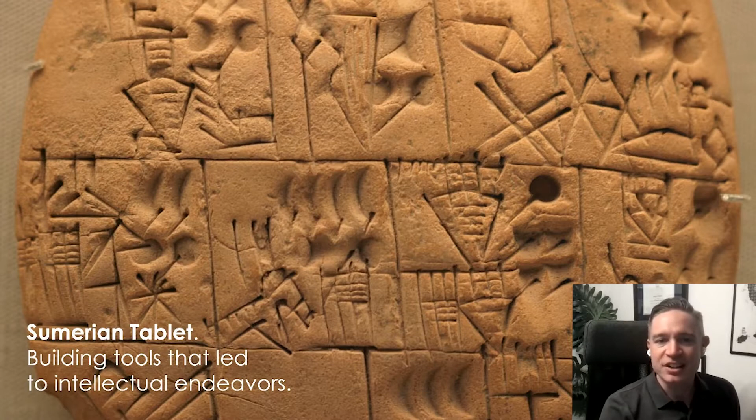The idea of writing and the idea of capturing language and communication took several iterations. The Sumerian tablet is likely the earliest, but interestingly, this as a technology allowed concepts and ideas to go from person to person, transcend generations. So now knowledge could be built over time and through many generations of people. Shortly thereafter, math was also a concept that started to come into existence, and one of our most important endeavors as we continue to push forward with technology.

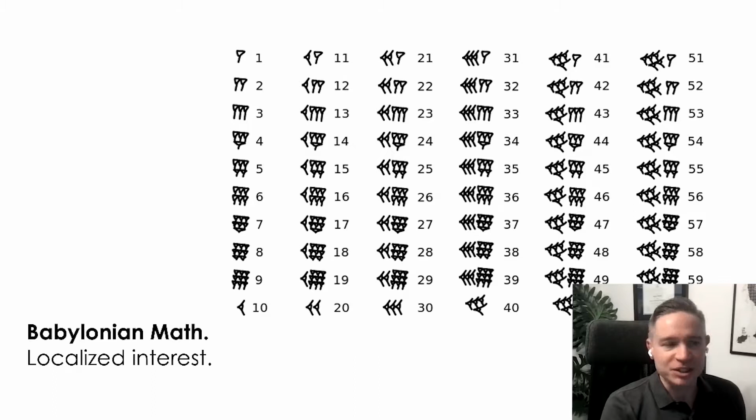But math was critical to being able to understand structural integrity. And with that, having an easier way to distribute information and distribute the learning of concepts like math required another invention, and that was something easier to capture ideas down on. So that was paper. So math, paper, and regional resources were what led to vernacular architecture.

And that was the study of certain materials and the way objects came together that performed well in our particular locale. And so now the advantage is that the locale had time with a particular type of materials where aesthetics started to be born, and the recognizable form is what we see as vernacular architecture. The abacus was our first calculator. Calculators are an incredibly important tool to visually understand mathematics, going beyond arithmetic and into even more complex concepts like algebra. Looking at anything with actual calculation required a tool to be able to do that.

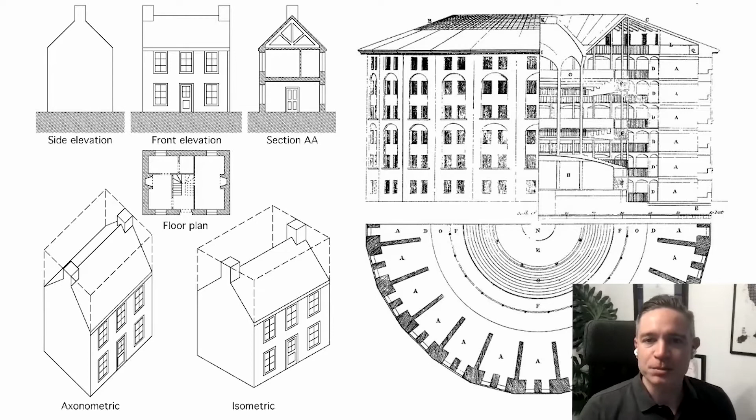Simple calculators and the written language led to engineered drawings. And so drawings is a very critical component of understanding the ideas and components of architecture and engineering and distributing them among many people. It allows us to simulate a construction before attempting it, and so saving all of that time, trial and error, to learn how we can build better performing structures. And the pursuit of building architecture or engineering, having drawings and simple calculation being served by simple tools, pencils, pens, straight edges, and paper was enough for hundreds of years.

And only one other invention is worth note here, and it's the Dewey Decimal System. And this idea of indexing is an incredible intellectual endeavor that led to many big ideas, as we'll get into in this conversation. The mechanical calculator is an adaptation on the abacus, and it was the first time really large numbers started to be conceptualized and put onto paper. And with this idea, mechanical calculator and paper, that was enough to build the modern world as we recognize it today. In the 50s, there were no computers, but there were large structures, simulated designs, and advanced engineering concepts at play.

Shortly thereafter, the computer began to form. And it is a series of calculators and transmissions of electric signals that can yield even more complex ideas and transcend even more generations with the way information can be learned, can be leveraged, and can be applied. Because of this, the technology itself started to get smaller, actually. And so digital calculators were able to now be a much smaller form of tool and much easier distributed among many people.

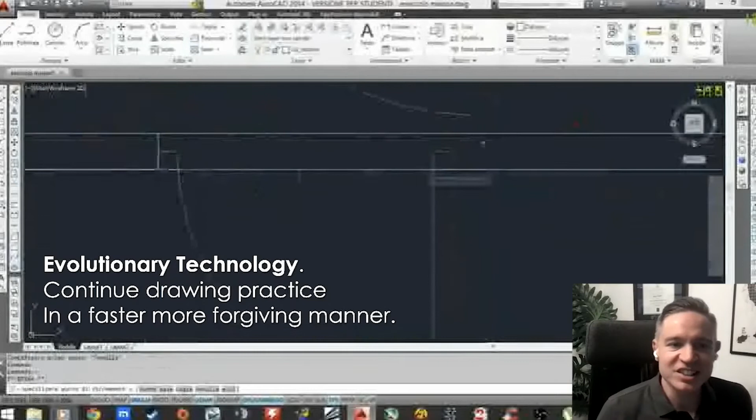Another really important technology is the graphic user interface. It made the complexities of computers simple, and it led to the birth of many new types of applications. One of them that we recognize, AutoCAD, as computer-assisted design. And this was an evolutionary technology for the practice of architecture and engineering because the actual process, the work, remains largely the same. It's drawings and lines on a piece of paper. It's just that all of the tools are now digitized. The paper is on a computer, and the pens have been replaced with vector lines.

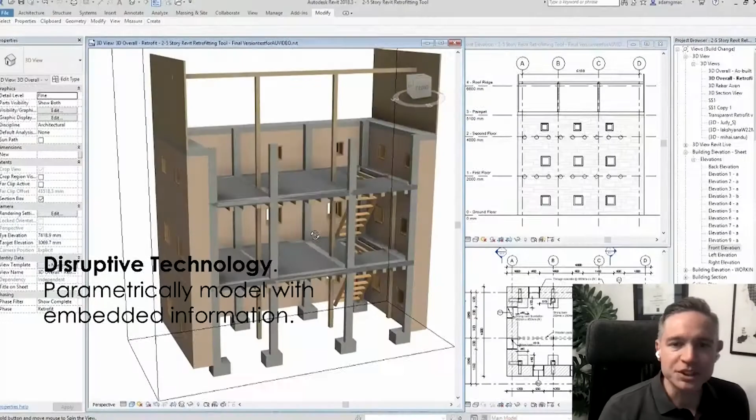Building information modeling came much later, but at the same time, it is a wholly different type of practice. So now the lines and what was formerly pens have now been replaced by a model.

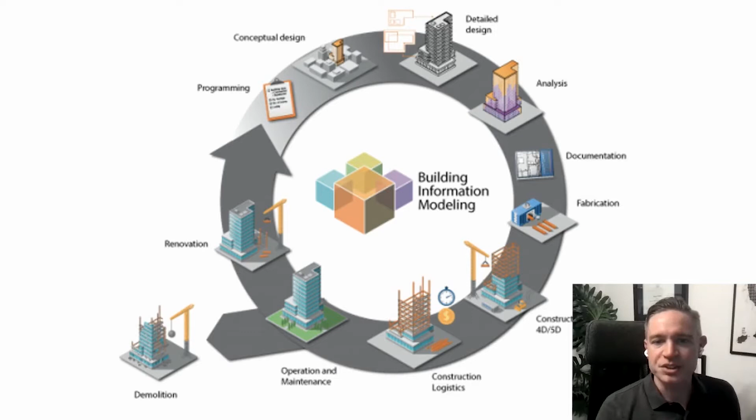And the model can be parametrically controlled, and it can have embedded information. And this changes the notion of what a drawing is, because now the drawing can be part of something much more complex. It can be part of a living digital representation of an actual building. And so the life cycle of that building can now be digitized, going from the initial conceptual design into maintenance and operation.

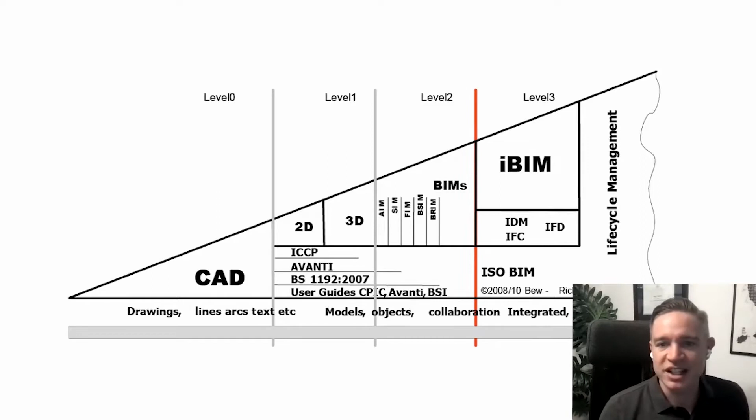This concept has been depicted many times, and the Bew-Richards graph is still highly referenced for levels of BIM that we're in today. But the important aspect here is the types of associations that we're aspiring on the higher echelons of the BIM level system. And it's connecting into standards, it's connecting into intelligence and things that can help with lifecycle management. But what does this look like?

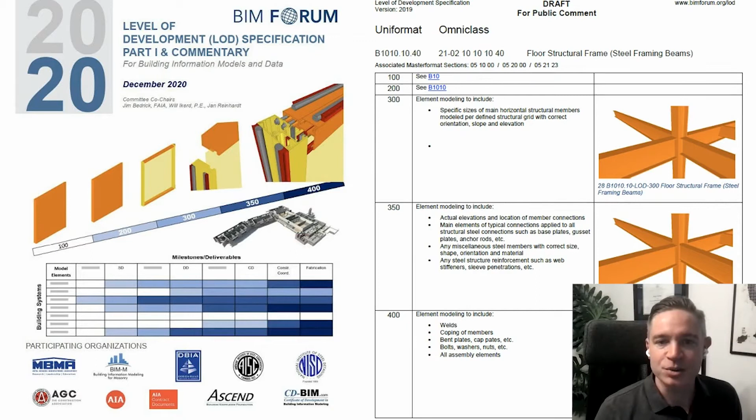If we look at level of development and we start to break down how all of these different pieces of the building digital components are coming together, we recognize that it's an index. It's an index of categorization, and it's an index that can start to reference different types of standards. The standards of this world are many, and all of them are just complex indexes, looking at how you can categorize and name, and then associating other things to it, the fourth dimensions and the fifth dimensions of BIM, understanding the time at which it might take to procure a certain assembly and the cost.

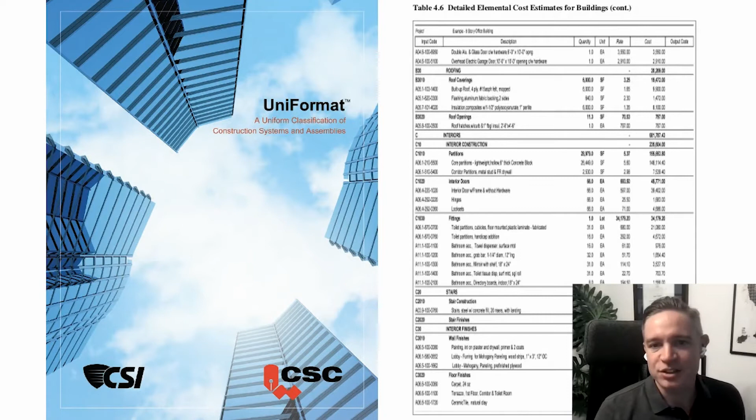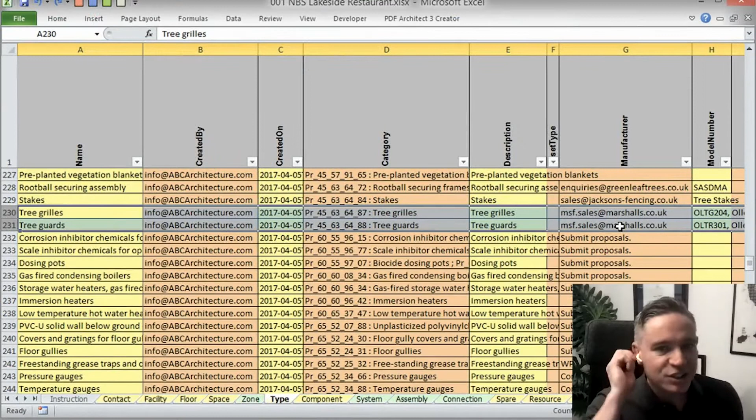But at the end of the day, the maintenance systems that operate all of our buildings and structures, they look like this. They're simple interfaces that are looking at very kind of simple calculators for KPIs and performance. And the information required, or the information set that goes into these systems, is a spreadsheet. So the spreadsheet itself is an index of categorization, naming standards, and description standards, all working together to make a depiction of these individual objects.

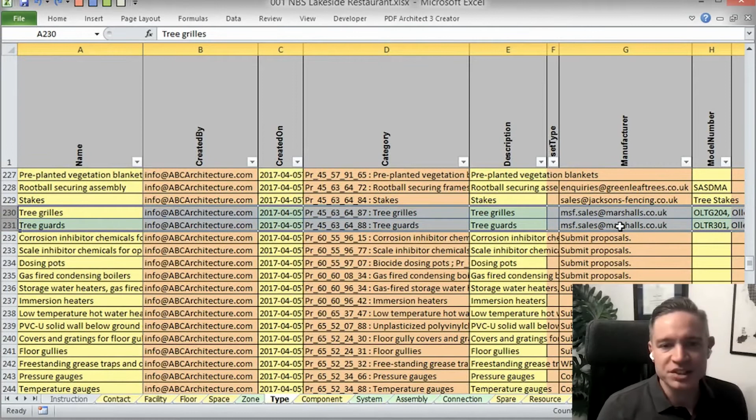So this puts us at a bit of a crossroads for competing motivations and where to develop and how we're going to move forward. On one hand, we can be more efficient, we can draw faster, we can deliver buildings quicker. But on the other hand, we have this concept of value, having a better approach to the designing of buildings and a more considerate approach in how we impact the world around us.

The finance industry has made several attempts to determine the return on investment of a BIM process. And if we look at it purely from an efficiency standpoint, the best ROI is by that of the building owner, because their building is getting simulated far more times digitally before it's attempted to be assembled physically. And then even post-physical assembly, the building has a lot of understanding in terms of its maintenance. It's already been considered for how to replace certain items.

But on the rest of the design community and the construction community, it's a tremendous amount of more effort because there's more intellectual content that's being generated as a part of the BIM process. Other concepts for value is understanding a computational approach. And this is actually not much different than a calculator. It still is a calculator, except now what we're calculating is an approach. And we're looking at typologies of design.

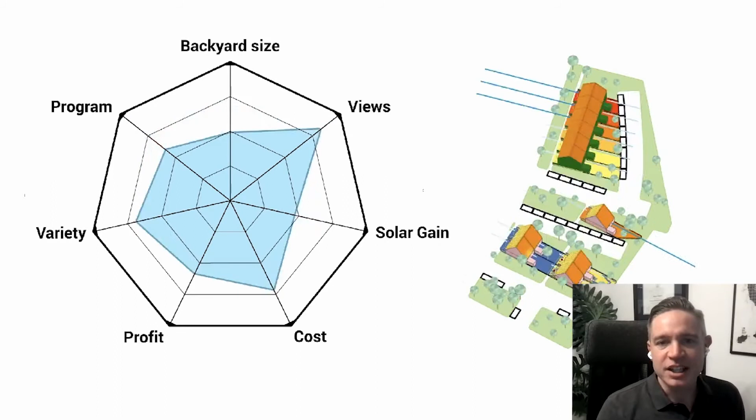And thinking about communication in this way, it allows a body of people to build on an idea over time and through generations. Building information modeling in terms of the value that it brings to a set of drawings is that there's this much simpler ability to depict three-dimensional information and relay it back to two-dimensional information and the metadata of that information. So tagging content, understanding that you can view and depict many different complex scenarios within a particular assembly allows a qualitative value that is much more around invention and innovation and greatly enhances the design process because of that.

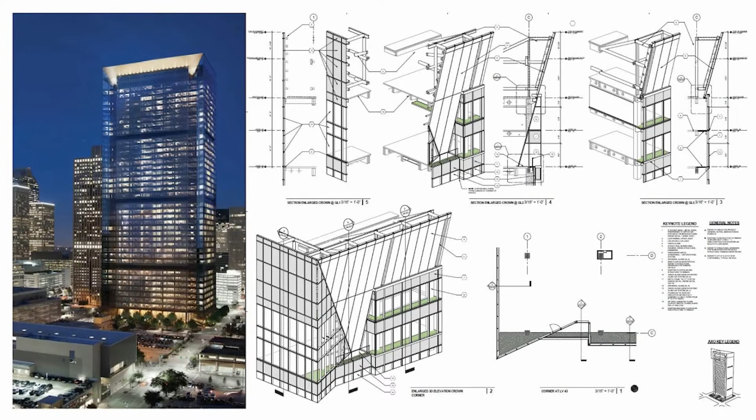Another complexity that we're seeing in our modern world is that as the internet becomes more ubiquitous, it's simpler and easier to create new types of applications that are small, lightweight, and niche. And the issue that this creates is that now you have many independent applications in a typical organization. And in each addition of a new application, there is a new data complexity problem happening in the background. And so this is creating a new enhancement to the BIM process that's much more considerate of that common data environment and that data schema that brings things together.

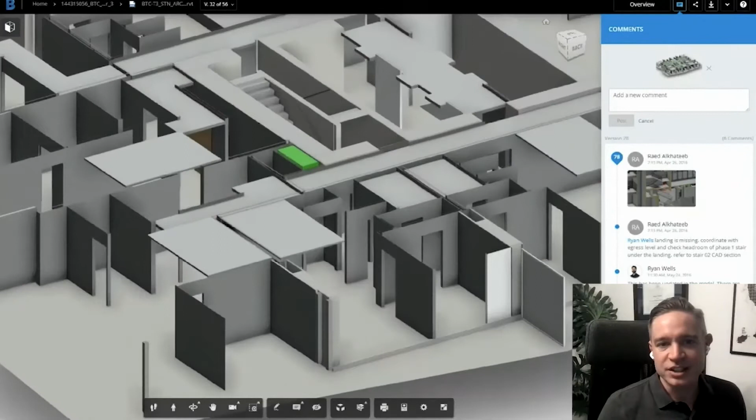Another issue that we're seeing is that even in the simplifying and distribution of complex models and data sets, it's getting commentary from people digitized. So the art of conversation and having it categorized, understood, and contextualized within a project, that's also a growing concern because as the buildings themselves become more complex, there's much more conversation required to understand the development of those buildings.

So when we look at these systems that are cloud-based, that have large and growing teams now collaborating and understanding how their work is performing per package or per milestone of project delivery, it allows us to question the contract model and how it forms and functions in terms of its data set.

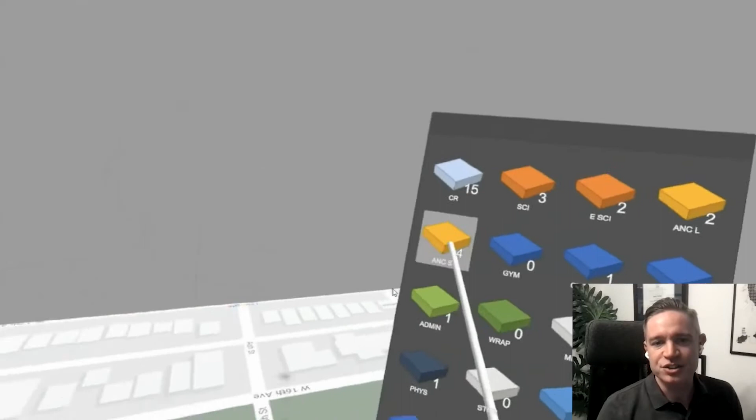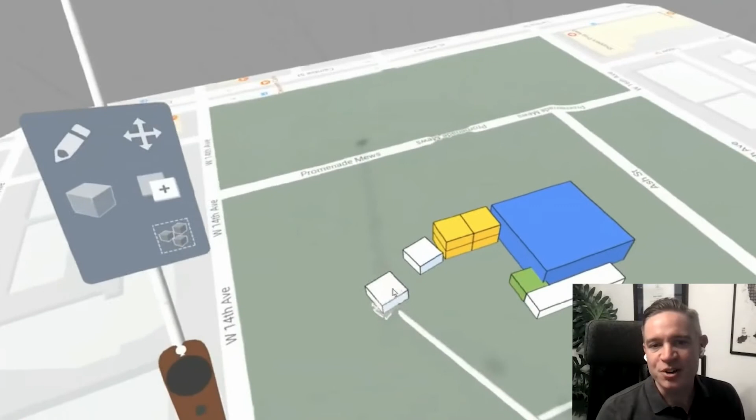And because of that, we're given this opportunity to rethink our calculators. Ultimately, what we're looking for is a better way of picking space and ensuring that the data profile in the background makes sense. Understanding the needs and performance criteria of a building is a holy grail in terms of understanding a data profile and categorizing things either by department, by building type, or by a particular owner's own unique legacy needs.

And there are many different things that we can do to start stitching data together, and understanding that data can be anything. In this case, we're doing a virtual punch list where, as one is making a comment, that voice commentary is being transcribed and geolocated within the model, which allows for data visualization concepts where we can start to think about commentary being very simple. The act of making a voice-based comment is as natural as having a conversation. So if you were to have hundreds of people go through the simulation and start recording commentary, you would get a very simple to understand demonstration of where the performance criteria may be failing.

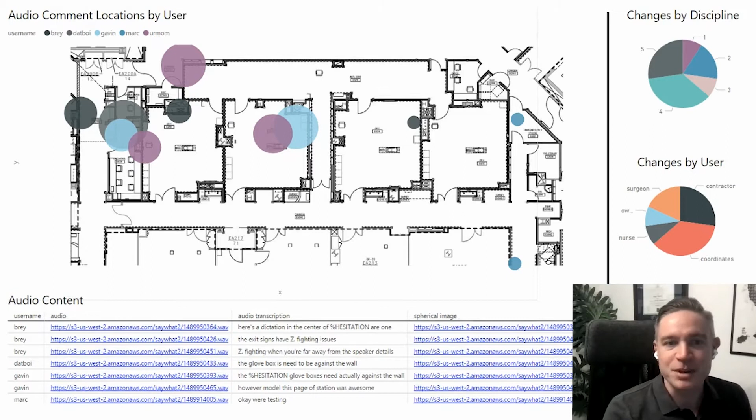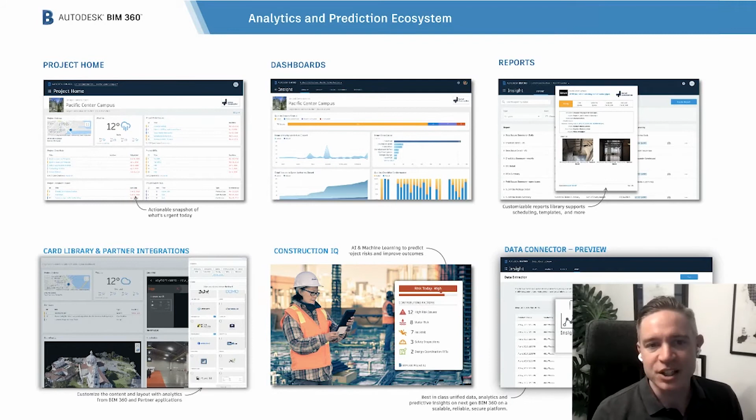So these are the underpinning concepts of the common data environment. And the common data environment itself is only getting more complex because it's connecting to more types of information. So when we think about how we want to connect to enterprise resource planning or any kind of business intelligence tools, the data schema in the background to connect these things is just becoming richer. So there has to be more consideration in terms of how they're going to connect. So the index system itself becomes a compounding problem if we continue to advance in that way. And the common data environment only has more that it can connect to.

Finding information from construction, understanding time delays, sequencing delays, how materials move around a construction site. There are many more things that can be simulated and understood, especially as we get into robotics and into the design for manufacturing workflows. The manufacturing world has been indexing for nearly 100 years. And to rationalize all of the index systems out there with yet another index system is just going to become an ever more complex problem to solve.

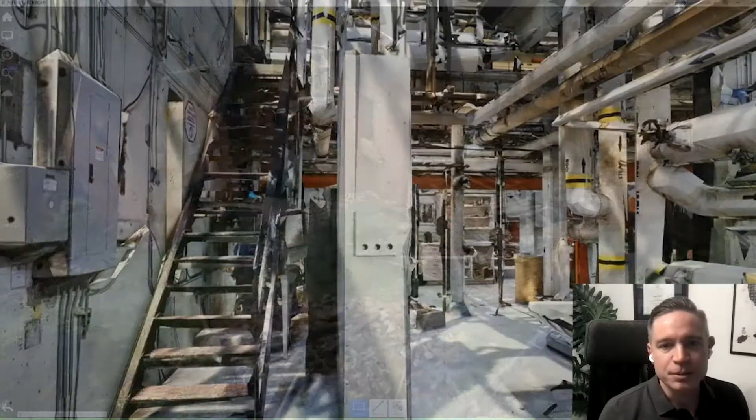And we haven't even tapped into the biggest data set that's out there, and it's actually capturing reality. And so voxel engines and any other types of technologies that are looking at rationalizing point clouds can start to objectify them, but it needs another data profile to start to understand what these objects are and how that might relate back to a design process. So the design process itself right now is served very well by having simple scans done to do design feasibility, to bring things in, leveraging real-time render engines. But the data profiles in the background are just left unconnected. So it's serving the visual purpose, but not serving that data-centric purpose.

So the ISO 19650 approach is to start to create a formal discussion on how information requirements are moved across a project. And even though this is a great endeavor, ultimately where we're going is that we have to think about how information is understood, processed, and then organized into simpler methods in which we can distribute it visually. And that's where there are really interesting technologies that are no longer leveraging an index system. Instead, they're looking at a graph-based database system.

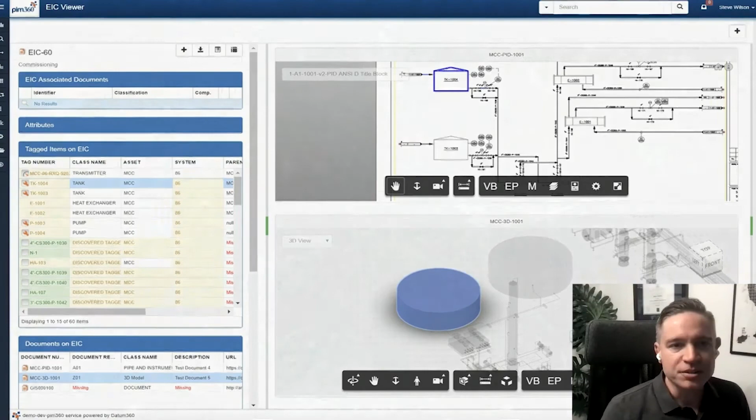And when graphing information, the ability to append labels and work seamlessly across all of them is something that's really unique, because the index system is something that can happen. It doesn't have to happen. And so you can have multiple index systems working congruently. And that is the power of graphing. Graphing allows free-form associations, stringing these things together. And so leveraging a database interface like MongoDB, this is really a brave new frontier because the index system is no longer required. The index labeling is something that can be done. It's a much more advanced evolutionary concept of this.